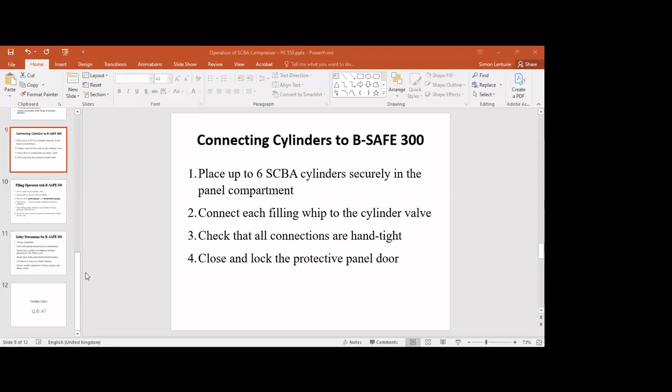Hello everyone, I hope everyone can hear me. I'm Simon Lenturie, firefighter from Moi International Airport, Kenya Airports Authority, employed since 2011 to date. I'm in Mombasa. So today I'll present to you about the self-contained breathing apparatus, the compressor, and the filling compartment.

When I was employed, we didn't have a compressor for filling the SCBAs. So the one that we have was bought around 2020, 2021 recently. It's new equipment, and we've been able to see the impact of this machine on our breathing system when we're using it during trainings and also when responding to fires. Our compressor is from Germany, it's a Bauer PE 550. It also has a filling compartment of six cylinders of 300 bars, which is called B-SAFE 300. After telling you about the compressor, I will also demonstrate a video of the compressor itself.

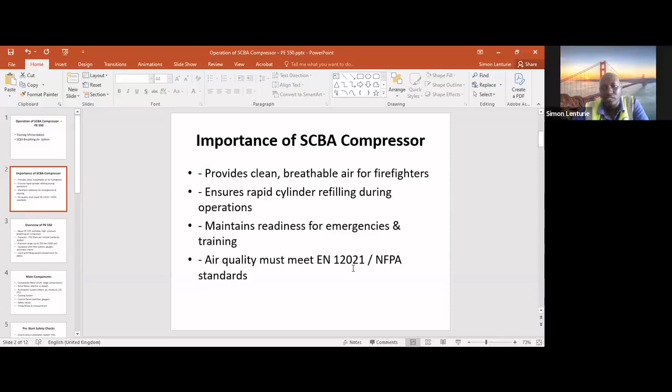Now, the importance of this compressor: it provides clean and breathable air for firefighters. It ensures rapid cylinder refilling during operations, when you are on ground or on the scene. When you want to refill quickly, it can refill 6 cylinders at a time within around 10 minutes. So it fills 50 bars per minute for all six cylinders. It maintains readiness for emergencies and training, and the air quality meets standards here - the EN 12021 and NFPA standards.

The Bauer PE 550 is a portable high pressure breathing air compressor, but portable means you cannot carry it by yourself. It can be moved from one place to another using machines. Capacity is 550 liters per minute, varying by model, with a pressure range up to 350 bars, which is 5,000 psi. Equipped with the filter system, gauges, and automatic drains.

The filter system is also automated in a way that it shows the usage. At a given time, it will give you a warning that this filter needs to be changed, so you don't have to go and open the compressor by yourself. It's just shown on the panel that you need to change this or do the service.

It's also used with the filling panel or the compartment for safety. So we have a compartment panel. This one is just for filling the cylinders. It's a compartment which is safe in a way that even if the cylinder explodes, the person doing the filling is protected. I will be able to show you that in the video.

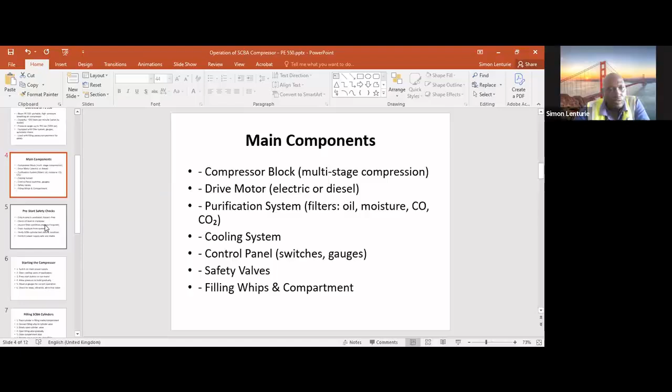Okay, so those are the components. Now we'll go on to starting the pre-start safety checks. Before you start your compressor, you ensure the environment within the compressor area is well ventilated and hazard free. So you check the environment, especially where we have placed our compressor, it's actually near the garage. Within that site, you make sure there is no vehicle which is on, emitting exhaust fumes, and also we cordon off that area so that no vehicle comes nearby.

Then you check the oil levels through the control panel, which will give you a warning if the oil levels are low. Then you inspect the filter conditions - although for our compressor, it can indicate if there is any condition which needs replacement or expiry, shown on the control panel. Then you drain the moisture from the system. There is a drainage tank outside the compressor whereby it drains the moisture automatically, but you still need to drain that residue of moisture before you start using the compressor.

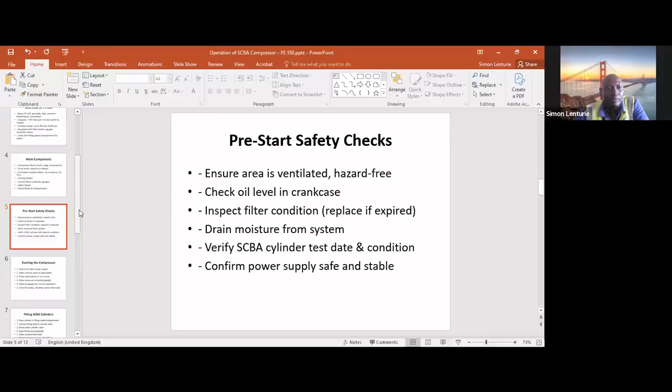Then you verify the SCBA cylinder test date and condition. Our SCBA cylinders and the machine, we usually do an annual servicing. Then confirm the power supply is safe and stable, making sure you have the proper supply voltage and amps for the compressor. That will keep the compressor running properly.

Then starting the compressor, you switch on the main power supply and open the cooling vents. You need to open the vents if there is any residue of air within the tanks, so you'll be able to release it before you start filling the tank. Then press the start button to run the motor and allow the pressure to build gradually. You observe the gauges for correct operation and check for leaks, vibration, or any abnormal noise from the compressor.

Filling the SCBA cylinders, you place the cylinder in the filling cradle or compartment. You connect the whip to the cylinder valve, slowly open the cylinder valve, open the filling valve gradually, and close the compartment door. Now you start filling and monitor the pressure gauge while filling.

You stop at the rated working pressure. The 200 bar is usually for the scuba divers' cylinders, and for our firefighting it's the 300 bar cylinders. For MOI, we only have the 300 bar. JKIA has both the 200 and the 300.

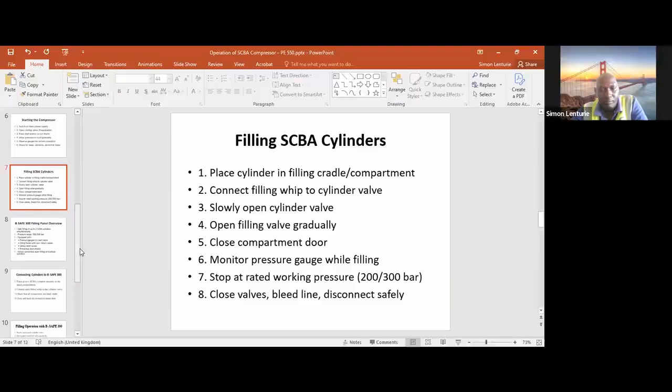Now, the filling compartment is the B-Safe 300 filling panel overview. It allows safe filling of up to 6 SCBA cylinders simultaneously. The pressure range is 300 bars for the one we have here. It's equipped with pressure gauges for each bank, filling hoses with non-return valves, safety relief valves, and a protective door shield. This allows controlled filling of multiple cylinders.

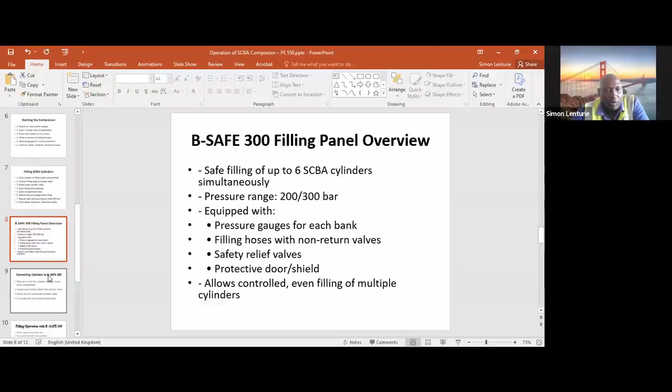Which I will show you from the video properly. For connecting the cylinders, you place the 6 SCBA cylinders securely in the panel, connect each filling whip to the cylinder valve, check that all connections are hand tight, then close and lock the protective panel door.

Now you slowly open each cylinder valve, open the panel manifold valve gradually, and monitor both panel gauges and compressor gauges. The filling panel has a gauge for monitoring, and the compressor also has a gauge for monitoring the filling and the tank of the compressor. This fills all cylinders evenly and avoids pressure imbalance between the cylinders.

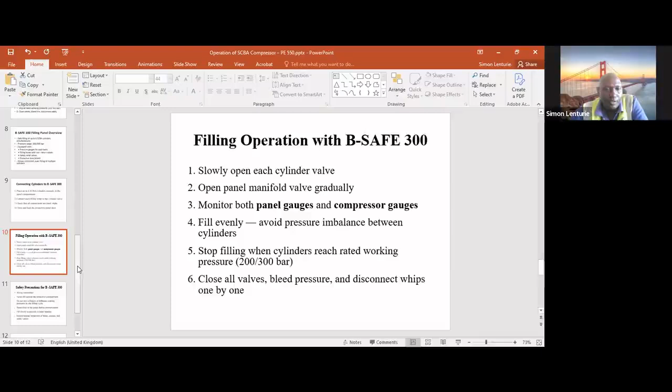You stop filling when cylinders reach the rated 300 bars, then close the main valve when 300 bars is reached. Then you close all the valves from each cylinder, bleed the pressure, and disconnect the whips one by one from each cylinder. That I will show you again from the video.

The safety precaution is to always remember never fill outside the protective compartment. Do not mix cylinders of different working pressures in one filling cycle. If it's not rated, like the ones here rated 300, you will not use the 200 cylinders here. Stand clear of the panel during pressurization, then fill slowly to prevent cylinder heating. Ensure regular inspection of hoses, gauges, and safety valves.

I think I need now to share the video so that you'll be able to see all that. So I will have to stop sharing the slides.

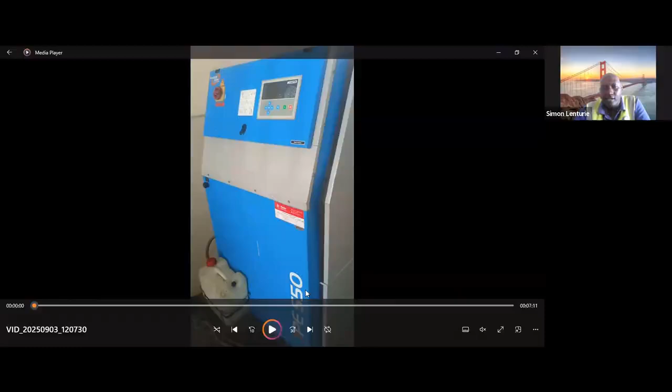So this is our PE 550 compressor. Yes, this is how it looks. I don't know if everybody can see my pointer. Yes, we can. Yes, so this is the switch of the compressor.

This is where you put on the compressor. This is the control panel, and this is where it will be able to show you the servicing of this compressor, if it is overdue, or if you need to change the filter, or any issue within this compressor, it will be shown here.

It will give you a warning within this control panel. So when I want to operate the compressor, I don't need to open any sides or inside of this compressor to check anything. I just need to switch on, then wait for the configurations of the panel to come on, then check if there is any warning. If there is no warning, I'm able to go ahead with starting the compressor.

The starting button is this one, the green one. Then the bleeding valve, the release valve, is this one here. This is where you need to release the air after finishing your operations within the compressor. You just open this one anti-clockwise, and it will release the air within the compressor before switching off the compressor.

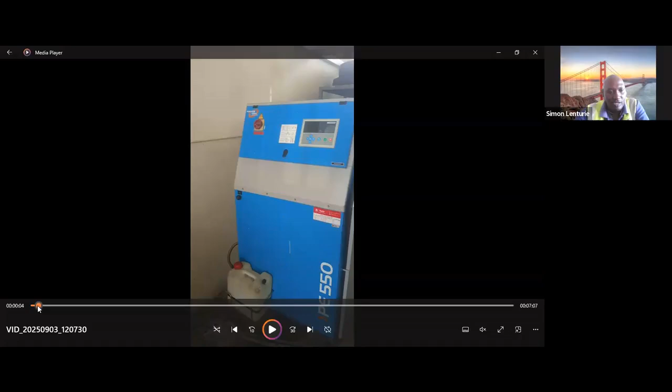Maybe I can just now play the video, then where you need my explanation, I will be able to stop to explain.

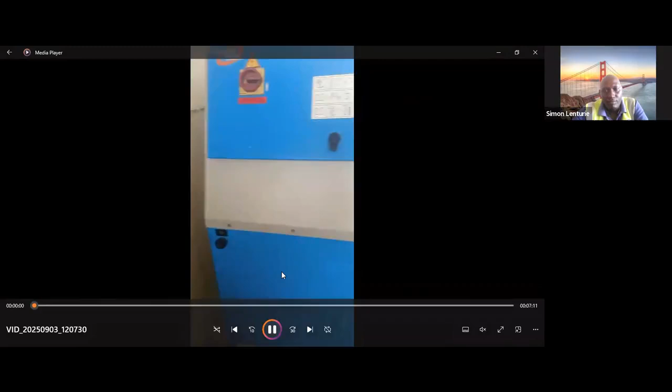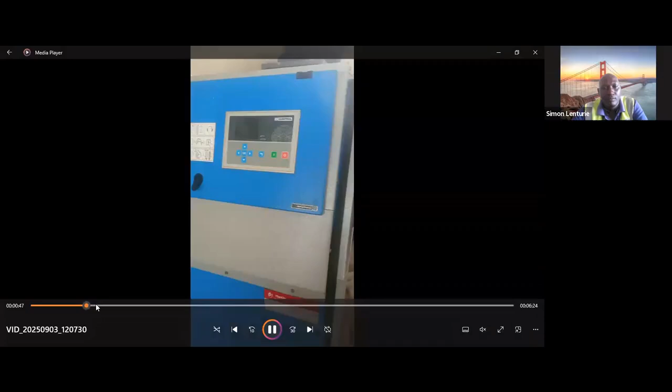I need to change the video. Yes, this one.

Now, as you can see from this video, always you need to cover your compressor because of accumulation. When the compressor is running, it always absorbs the air, the atmosphere within the atmosphere. So if there is a lot of dust within the atmosphere of the compressor, this all is taken through the filter, so your filter will die very quickly.

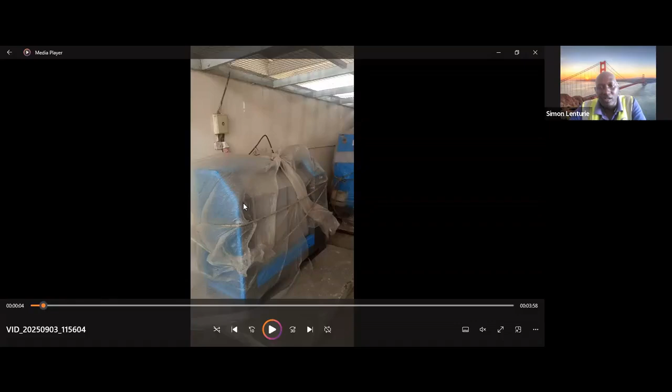So you need to always cover the compressor from dust. This one's just to protect from dust. For us, we are planning to have better covers because it was not placed in our BQ when it was being procured, so we are yet to buy or procure new covers for this. So this is just a stopgap for the process so that the machine cannot die within our operations.

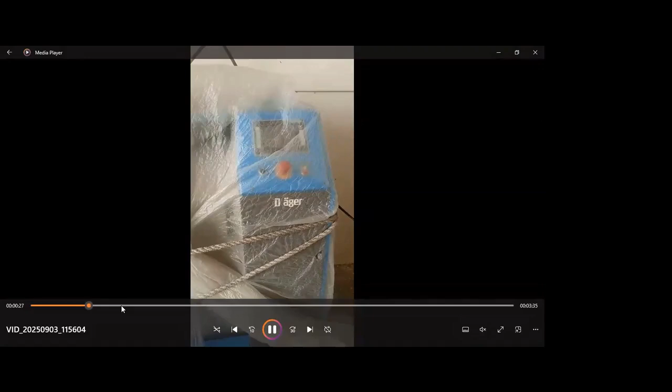So these are our cylinders. The ones you can see on top here are the Dräger cylinders, the 300 bars. The first piece down here and the back plates are not from Dräger, so we are not using those now, they are the old ones. Nowadays we are using the Dräger back plates and also the cylinders. So these ones down here, we are not using now.

Hey Simon, we do have a quick question. Yes, yes, if it is covered, where will it pick the air from if it is covered during operations? So you want to explain during operations how you uncover it to allow the airflow?

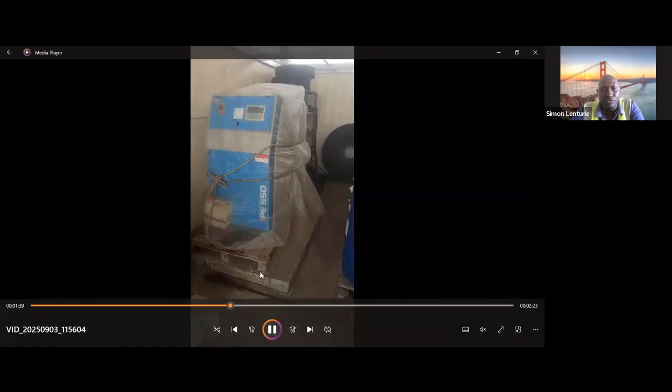Okay, when you want to operate the machine, you need to remove the covers. As you have seen in the first video, there were no covers over the compressor machine. So when it's not operational, you need to cover them to protect the machines from dust. As I said, we are yet to buy good covers for this compressor, but always you need to cover them. That's why we are using these nylons here to protect the machine from dust. I hope I've answered the question.

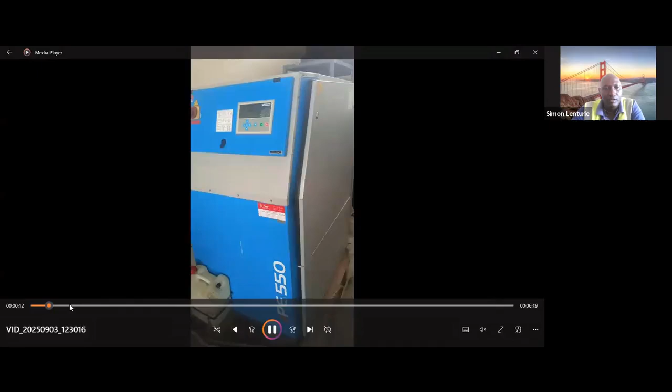Yep, thank you. Just need to go to the next video.

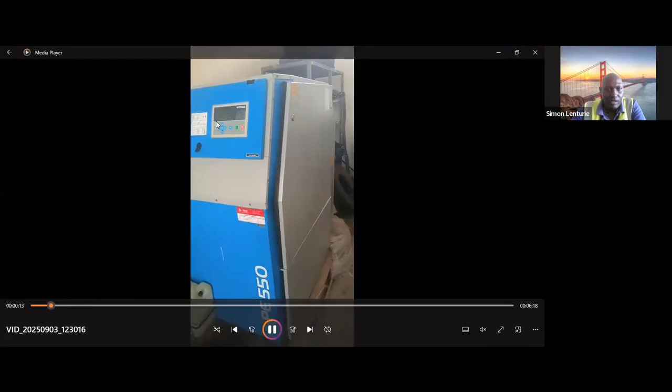So here I've already started the machine. As you can see, the panel can show that there is some air in the tank.

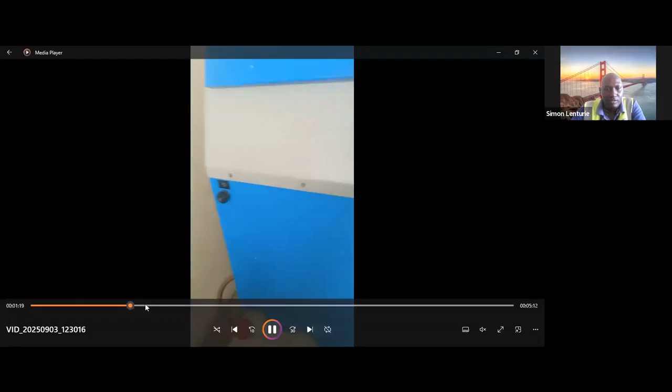And also the filling machine is on. This is the filling machine. Here I have not yet put the cylinders, so I've just started the machine, but I've not yet placed the cylinders inside. You see, this is where you place your cylinders, they need to...

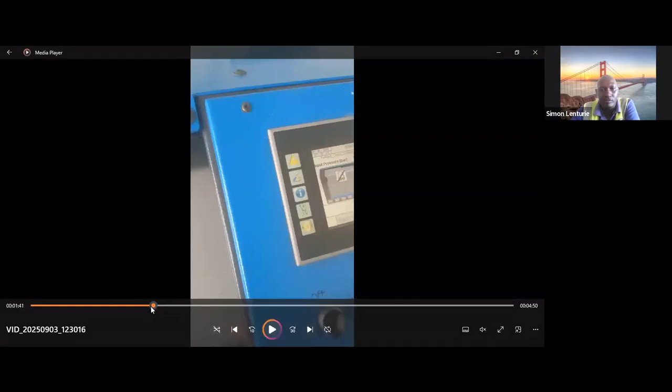This is where you put your cylinder. These are the valves, this is the bleeding valve of the filling compartment. This is the gauge, the analog gauge, and then we have the digital gauge from the control panel.

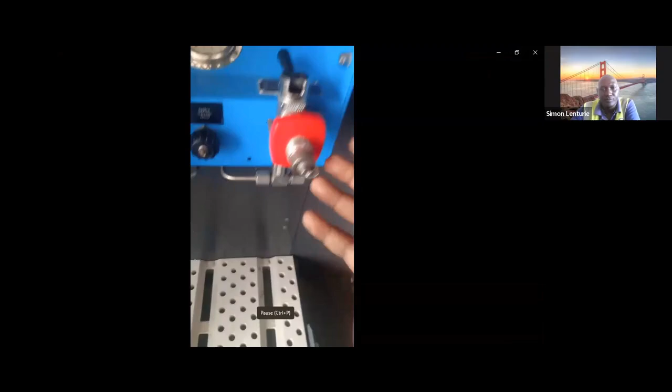I don't know if you can hear the video. So mostly what the item that usually wears out here very quickly is the O-ring, the O-ring here. So we need to replace this annually so that the filling compartment or the filling coupling works properly.

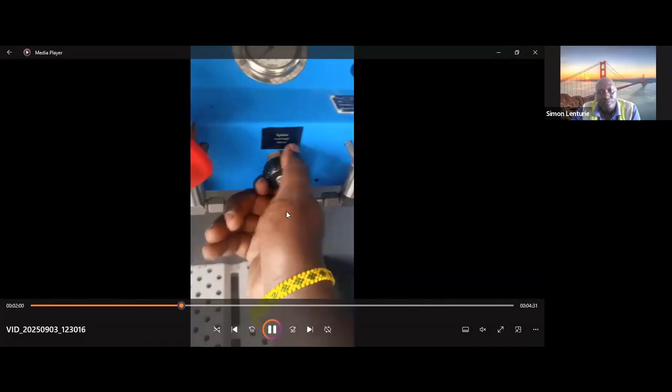Yes, as you can see here, when you put in the cylinders, the pressure inside is read evenly for all the cylinders that you have put inside there. So all of them will be at the even pressure, which will total to the 100 bars.

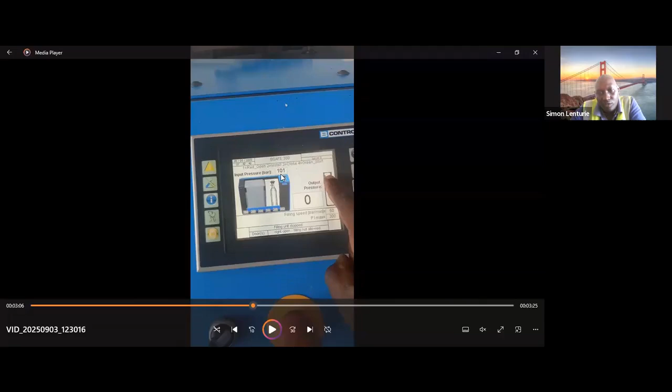Now this gauge here shows the compressor, this is the compressor gauge. It shows that the compressor has 101 bars. For this machine to fill, the compressor should have more bars than the one within the cylinders for it to fill. So if it is less, the machine will start to increase the bars or the pressure.

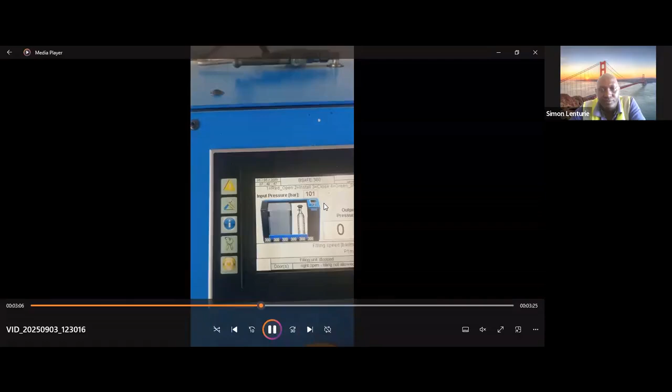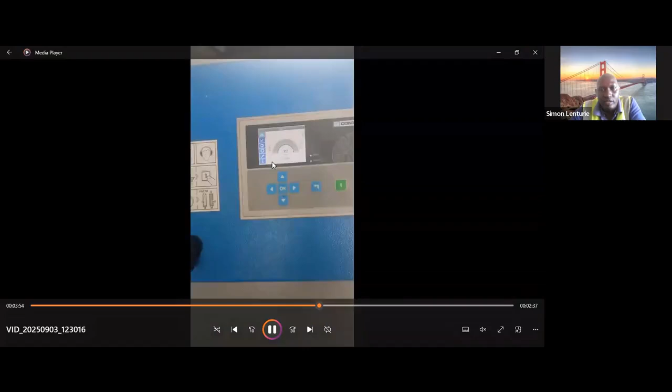So this is the starting button of the compressor, the green one. Then you'll be able to monitor now as the machine starts to fill.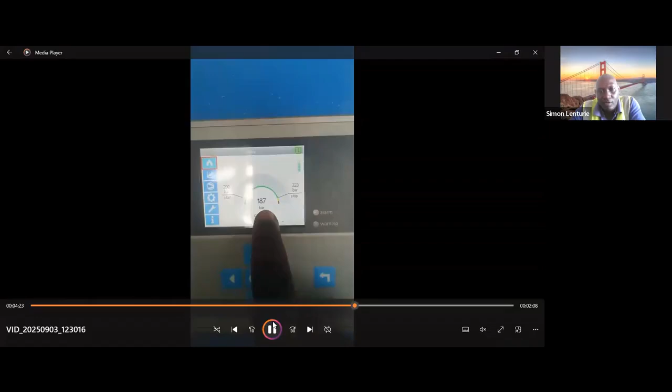Okay, this small bar you can see here is for the filter. As the machine is being operated, the filter bar goes down until it gets to the warning yellow light, and then to the red. When it reaches the red, the machine will not work. It will just switch off by itself. You will not be able to operate this machine. So those are the precaution measures of the machine, so that you don't use a filter which is expired.

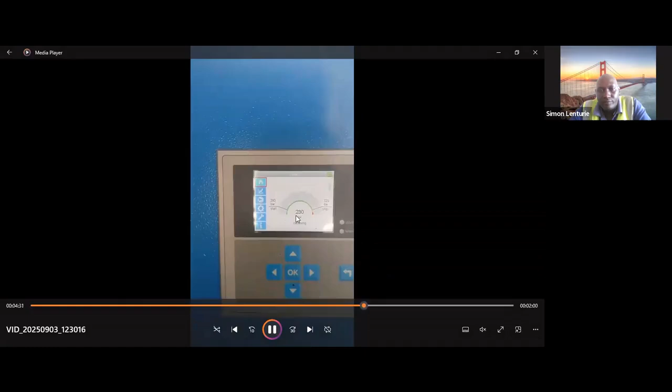As you can see, the bars are starting to rise, so the air is now filling the compressor machine. For the first run, you need to release the air from the compressor just to clean out the system before filling in your cylinders.

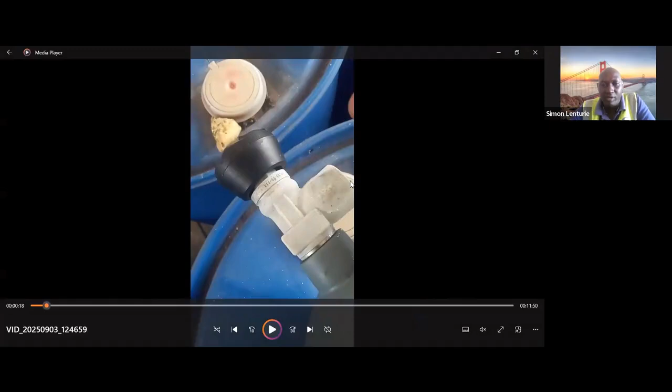So as you can see here, this cylinder, as I was draining, there is ice formation within the coupling here. This shows that the air inside is very compressed and very cool, so when it comes out, it ices the coupling. You can actually feel the effect of the cooling from your air system when breathing the air within these cylinders.

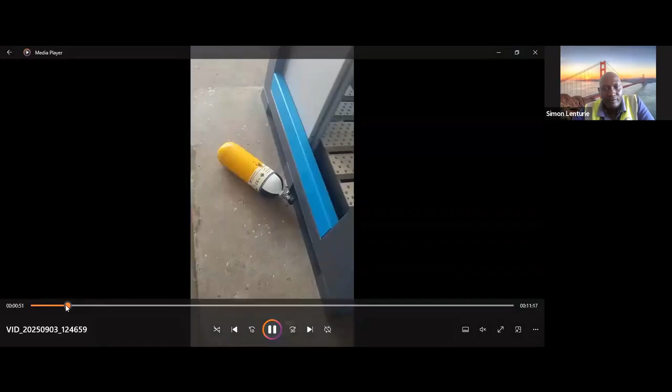So I've opened now the compartment. Now I need to place the cylinders in the compartment.

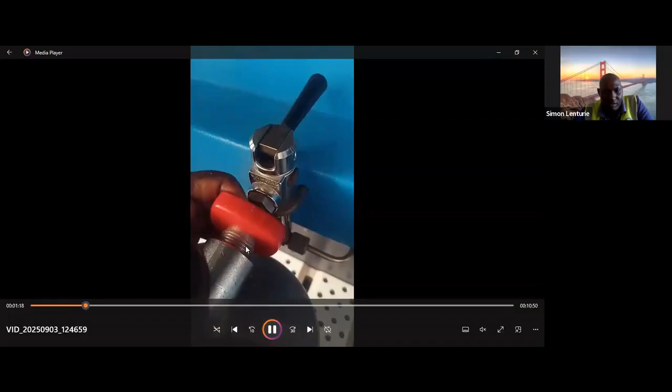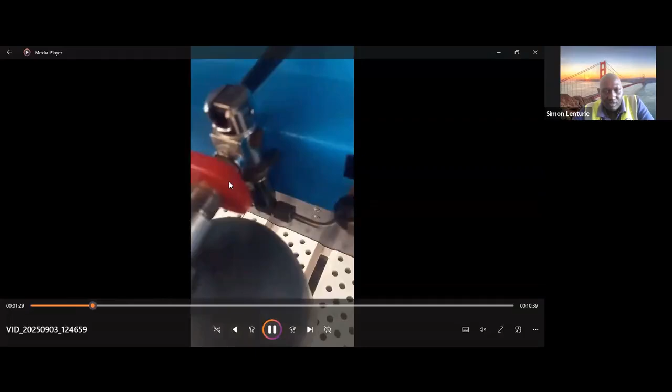This holds the cylinder during filling, so that if you don't screw this properly, the pressure will not be able to fill the cylinder. There will be some leakages within here, so you need to do this properly and very tight.

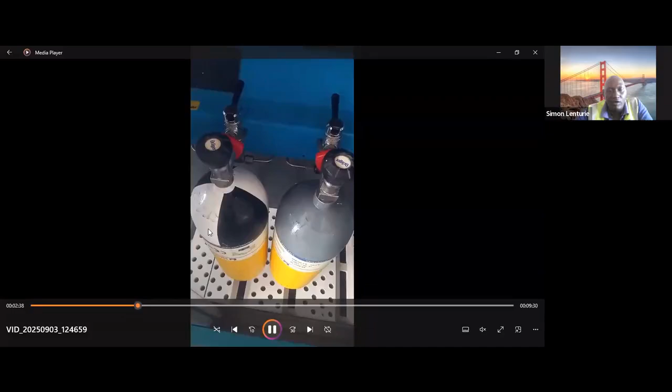This was the second one. So I have now fixed the two cylinders.

Now I need to raise the valve. So after fixing the cylinders, I have to open the tongue, the valves of the cylinders, this one. You open the valves of the cylinders. Now I raise up the valves. These are also valves.

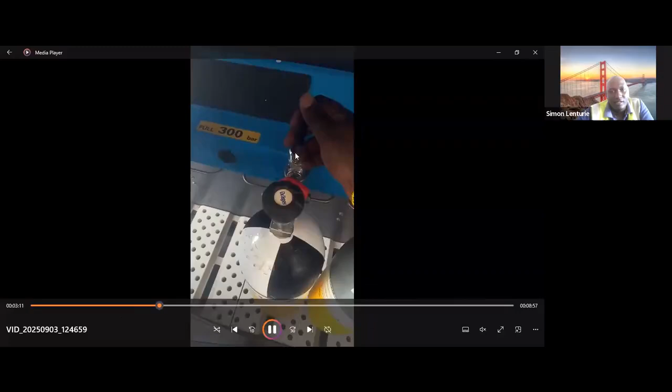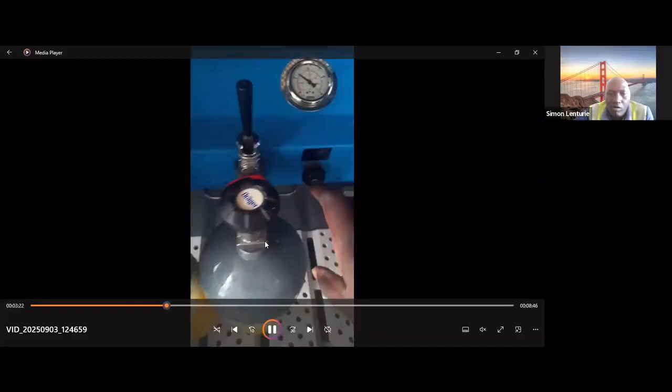Now, if one of these cylinders had more air than the other, they are now distributed evenly to the two cylinders, so they will now read all of them the same pressure of around two something here. Actually it's 129, as you can see from the video. Now we need to fill this cylinder up to 300 bars.

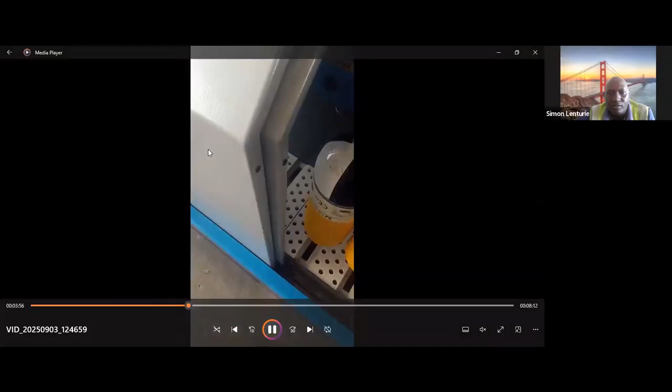So now I close the compartment, which now you can see is closed and locked. Then you come here and you start the compressor. Make sure that this one is closed so that you don't release your air.

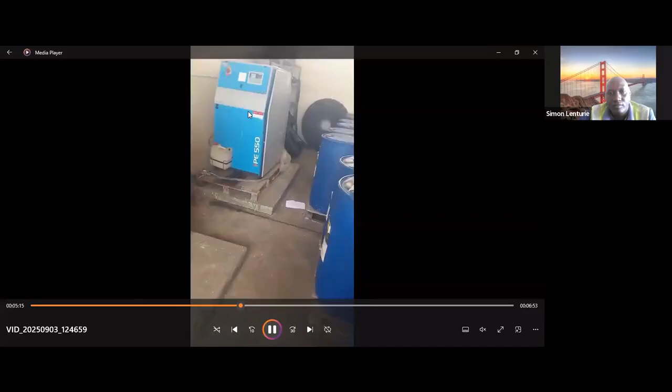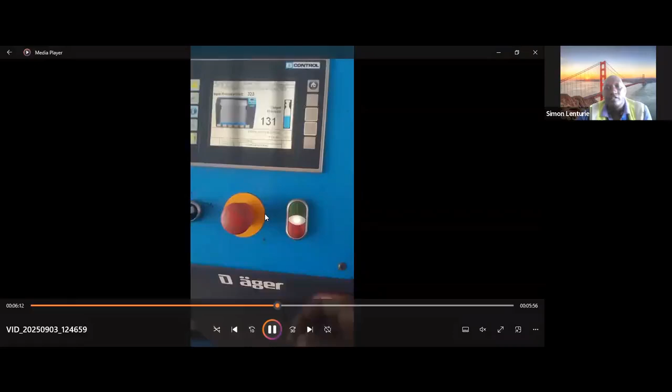I need to run the video forward. Yes, as you can see, the gauge from the compressor is 323 and this one is 131, so now it will start to fill the cylinders.

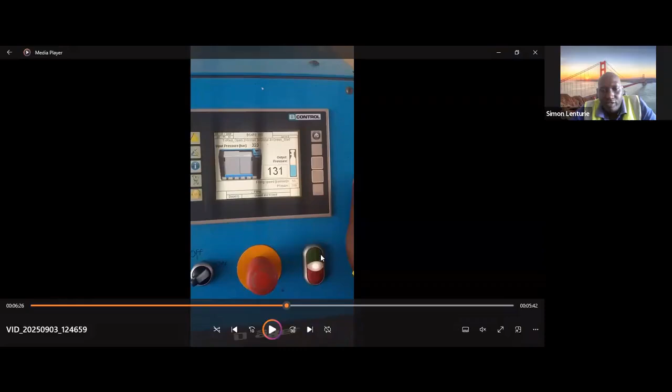And for you to run the filling, you need to press this button here, the green one. That's when it will start to fill the cylinders inside the compartment.

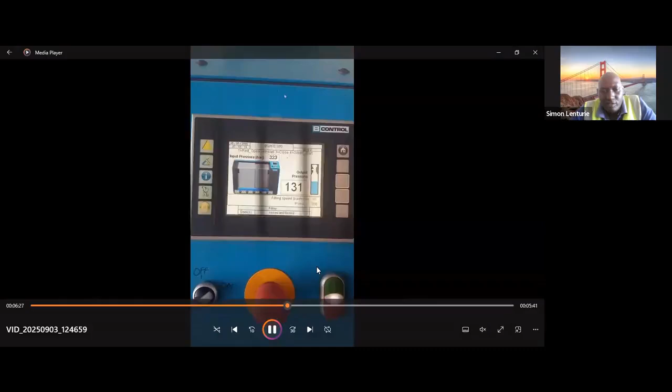It will now start filling automatically. As you can see, the gauge starts to rise, and it will take time. The filling speed is 50 bars per minute, so you can do the math here to figure out how long it will take for it to reach 300 bars.

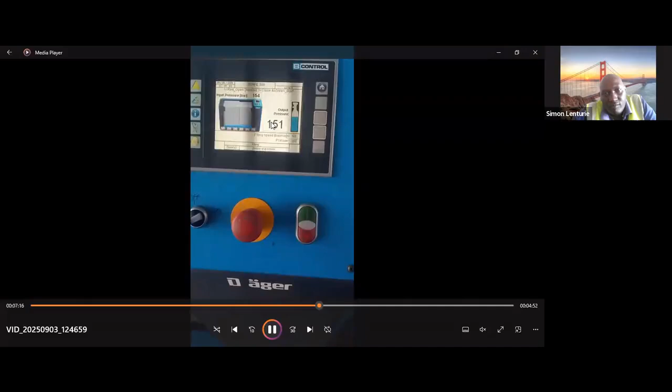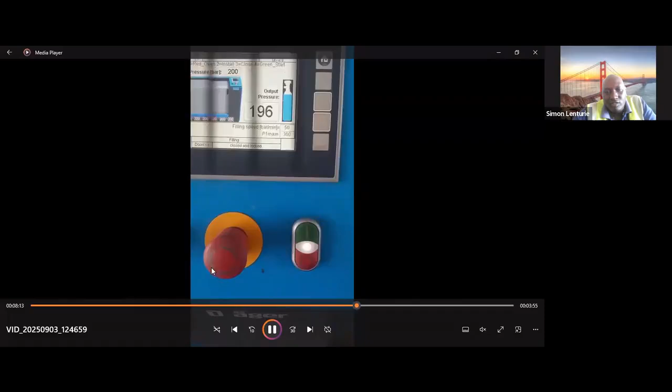So as it fills, there is also some light blinking here, just to show you that the filling process is on, so that you don't stand nearby. You may press this button, the emergency button, by mistake.

Now, at the top of this machine, there is a valve here which my video cannot show properly. When this one is full, when it reaches 300 bars, you need first to close this main valve on top of the filling compartment, so that there is no air escape within the cylinders as you open the compartment. Then after that, you press this red button to open the compartment.

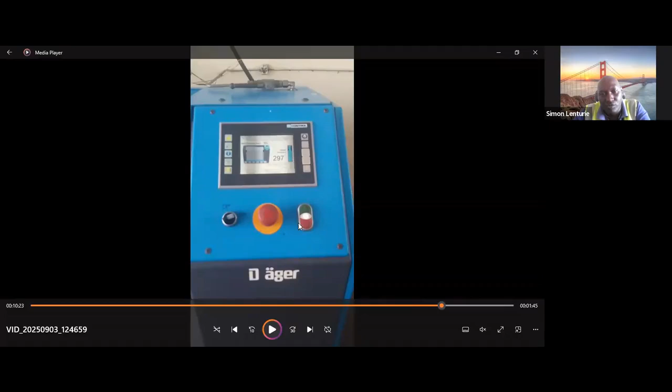Yes, this is the valve, the main valve for this filling compartment. This is the one that you raise up slowly. Then you press this red button, you'll be able to open it. You close the cylinder's valve, then you unscrew the cylinders.

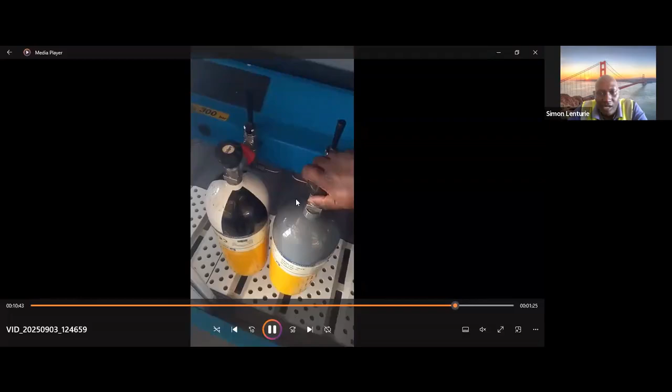So now it is full. I need to press here and then close the valve on top, which I've done but not shown in the video. So now I've opened the compartment. Now I close the cylinder valves. They are full.

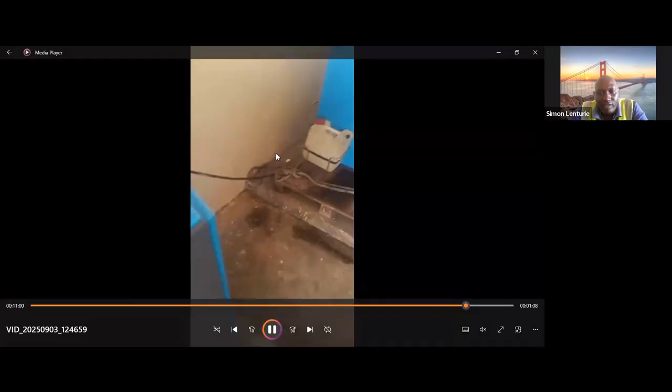Now when they are full, then I put off the compressor. I come back here. I close down these other valves.

Now, before unscrewing the cylinders, I have to release the air within the system, because you'll not be able to remove these cylinders if there is pressurized air in the system. So I have to bleed out the air first, as you can see in the video. You can see through the gauge, make sure that all the air is out up to 0.

When that's okay, now I'm able to unscrew the cylinders.

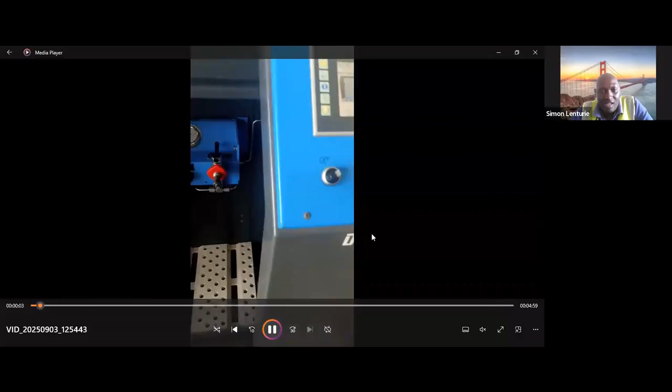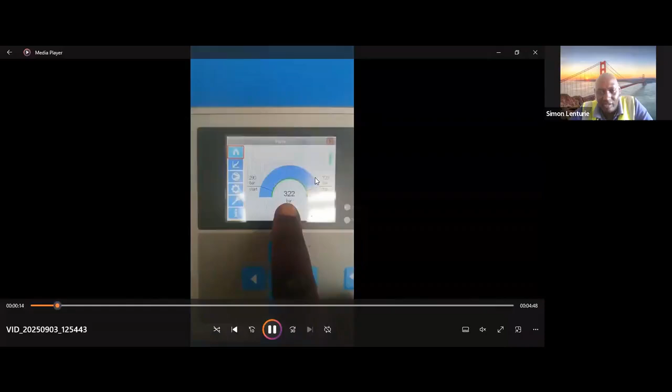Now after that, I come here to the main compressor. I have to release this air within the compressor before I switch off the machine. So you release it.

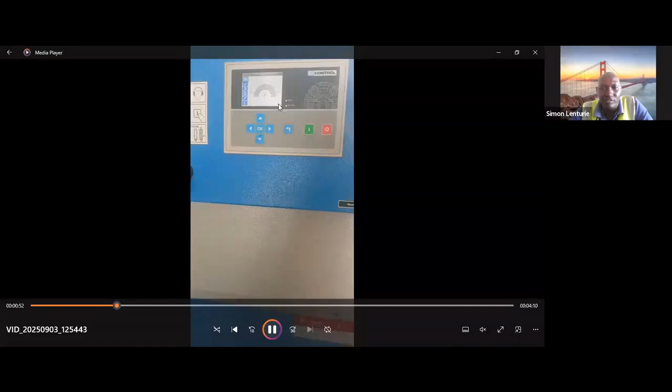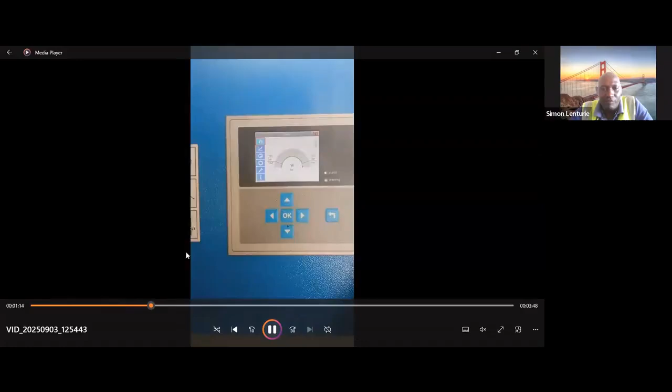Now, when you release, it will take some time because there is some residual air within the system, so it will still come back to the tank. You need to have it open for some time. When I close here, you will see the compressor is off, but you will see some air entering the tank, as you can see. So you need to leave the release valve open for some time.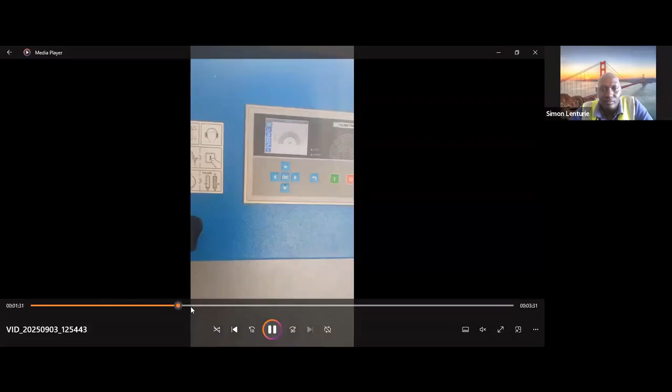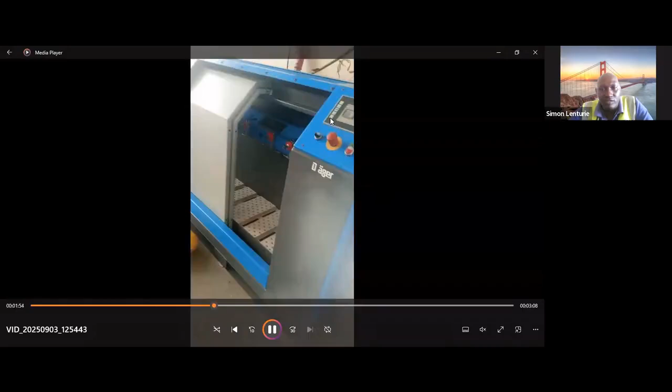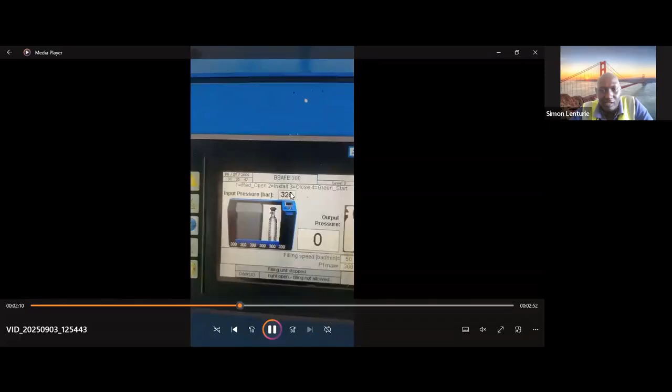After that, now when you have released all the air here, you come to release again. You can see this valve is still closed, so the gauge is reading that the compressor has 320 bars. I need to open this valve so that you'll be able to read the correct pressure. Slowly, now it is reading 0. All the air now is gone, so the compressor and the compartment are free from any pressurized air.

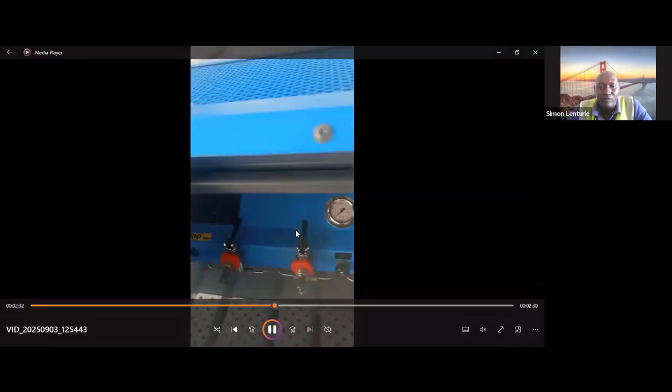So now I'm able to close down the machines.

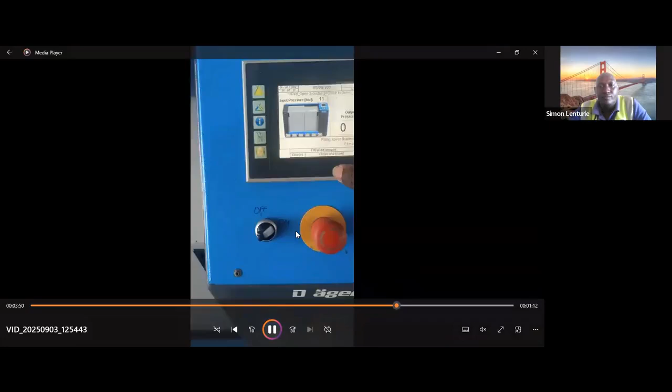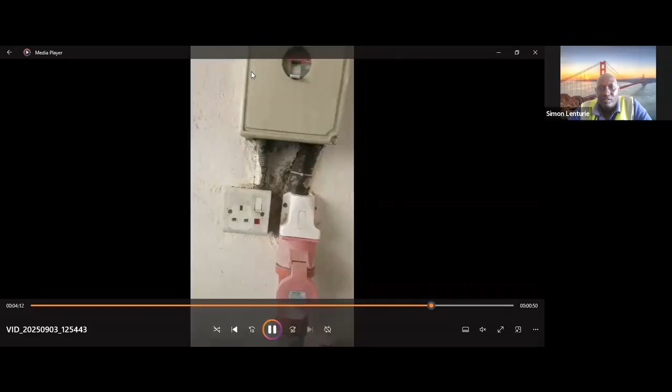So everything is safe. Now I switch off the machine, and then you switch off also from the main switch. Can always remove that. Yes, now the machine is safe. I can now cover the machine after that.